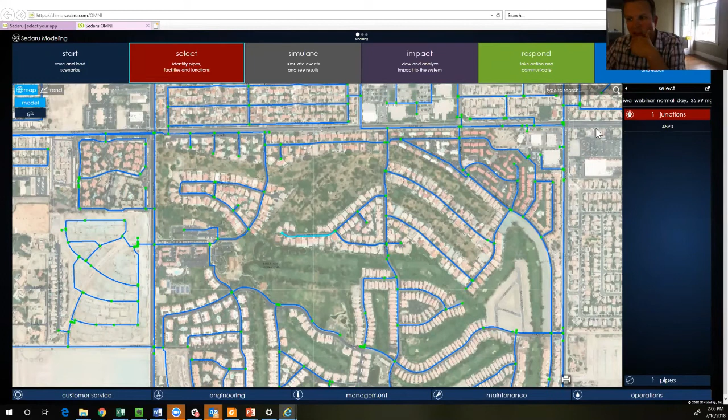So what's really neat here, I can use the map and zoom into whatever area that I want, and I can just pick a spot on the map. I'm going to pick this dead end here. And let's say I have a request that I want to see what I can do for fire flow here. So I click on that, and you see I have this junction selected. And if I go to the next button here that says simulate, it gives me a bunch of options for what I want to do, and I can choose one of those options.

So from here, I want to just be able to meet fire flow. So I'll click on that. And then it has this handy flow chart that really walks me through the process. So right now we're looking at a little over 6 GPM as the normal demand that's there. But I want to see what happens if I want to get 1,000 GPM out of this location. So I'll just put 1,000 in there. I'll click done, and it tells me what I'm doing up here. And then I just click run simulation.

What's cool about this is it's using the EPANet engine to run that simulation, and it's giving me back the hydraulics essentially right away. So it's going to spit out for me this hydrant curve. And you see along here, it's telling me exactly what I'm able to get. Right here at 20 PSI, I can get over 1,000 GPM. So it's laying out exactly what it should look like, giving me that full hydrant curve within a couple seconds of running the model. I can come back in here, and now I can view the map as well.

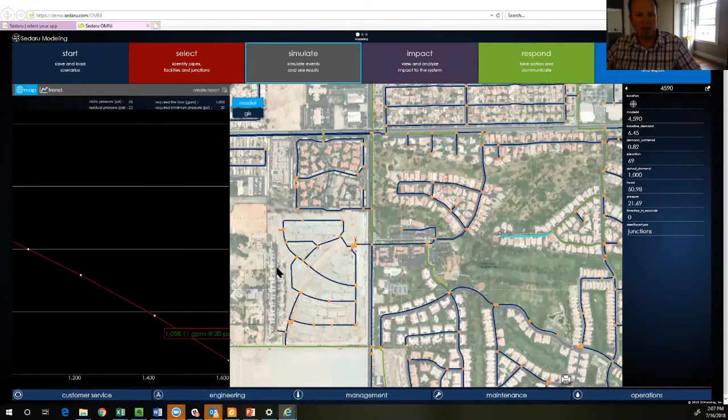And so the map has now color-coded everything for me. So if you look here, everything that's in orange is in the 25 to 50 PSI range with that demand that's on there. And I can see the results pretty easily. My velocities are color-coded. You notice the green pipes over here are ones that have a little bit higher velocities. The blue pipes are all pipe with less than a foot velocity in there.

So I very quickly can kind of see the results and say, okay, hey, if I needed to get 1,000 GPM out of this location, that's pretty doable. Well, let me ask you this. So that seems pretty cool, but what happens if we lose supply to one of those feeders going into that neighborhood? Yeah, I mean, common too, right? Like if I'm evaluating scenarios sometimes, or if I'm evaluating shutdowns, I might want to say, hey, I need to take an area out of service, but I still need to check fire flows. I still need to maintain sufficient fire flow protection.

So let's say maybe this north end of this development here, I'm going to lose service in one of those pipes that's in here. So I'll come in, I can just click on that pipe, right? I can see the details of it if I want. So I can come in there, I can see what we're looking at. It's an 8-inch pipe. Basically all the data from my model is going to show up in there if I wanted to look at that.

But then once I come over here and hit simulate, you notice up here it has a little thing where it says more changes. So now it's going to let me make more changes to this scenario that I'm working on. So since I have a pipe selected, here's my options that are in front of me. And we're just going to go ahead and close this pipe, bring it right out of service. So I'll go here and I'll click close. And then I'll click done. And now what we're going to do is rerun the simulation. And so it's going to update my fire flow for me.

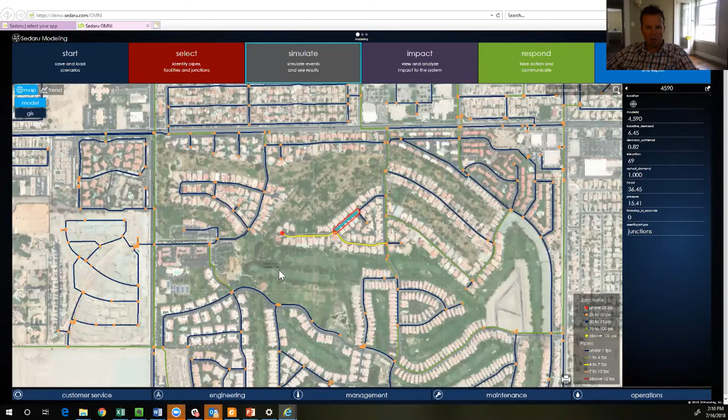Yeah. And then if I go back to my map, I'm going to be able to look at the color coding there as well. And I'll zoom out a little bit. We'll see what the rest of the system looks like here. And so now you look, as I get even farther away, over to this part of the system, which is farther away from the sources here, you see lots and lots of problems showing up in here as well. So clearly having that kind of fire flow coming in here causes all kinds of problems. And then within that area there as well.

Yeah. Is there other impact to that then that we could see? Yeah. So when I come up with the impact tile, I really like. So one of the things that happens when you're running a lot of the traditional hydraulic modeling softwares, I have to spend a bunch of time figuring out how to interpret my results. And what we've tried to do here is to make it really straightforward for you to see what is the biggest impact. So just really putting it out in front of you and showing you, okay, here's really the key problem, the key issue here.

And so what you see here, you see these red dots kind of flashing. That's showing me what are the top 10 nodes or junctions within this model that are going to be affected by this particular item here. And as I move my mouse over here, you'll see the red dot move and change. Yeah, it's kind of pulsing there. Yep. And that lets you focus in right on that and see exactly what the issue is, see exactly where the problem is.

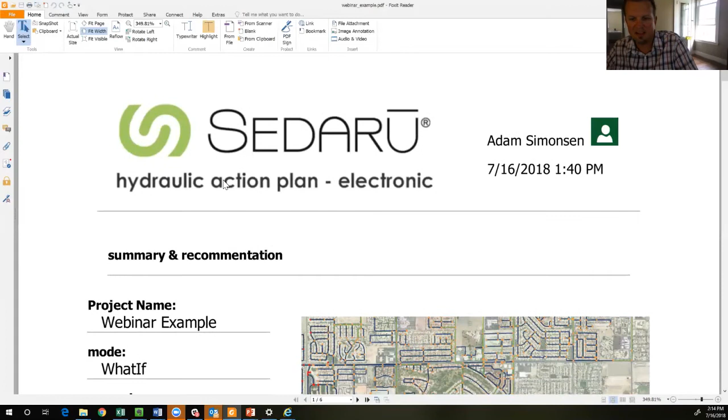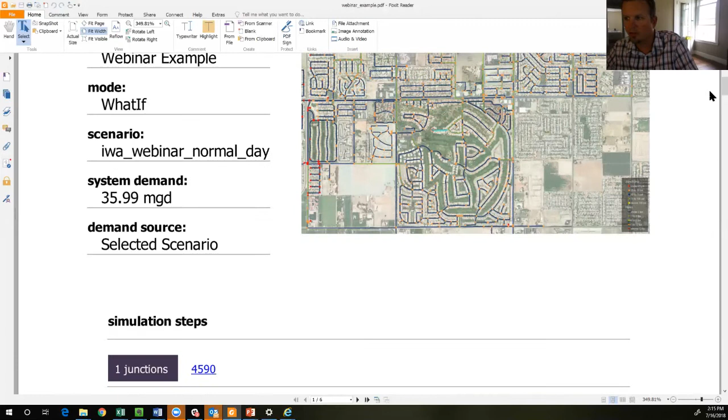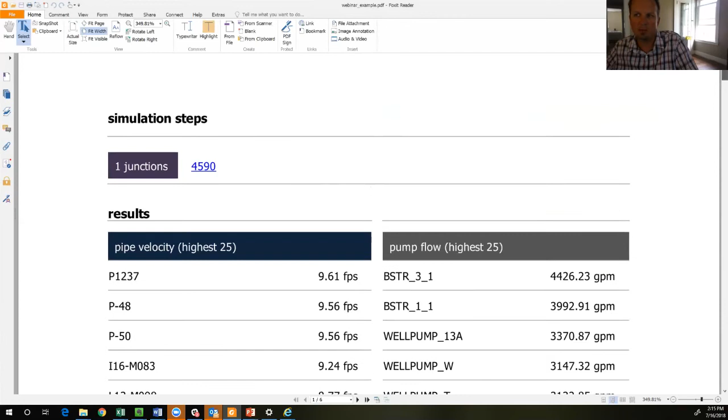So we'll let this generate and take a quick look at it. All right, cool, I think that report's done. I'll pop it up here real quick. Now I get to see the same thing: where were we looking at? What was the area? What was the system demand? What steps did I change in here? What kind of results did I see? I can scroll through all those, and you've got all of that tidied up in the report. So that PDF becomes really easy to pass on to anybody you want, developers or just internally as well.

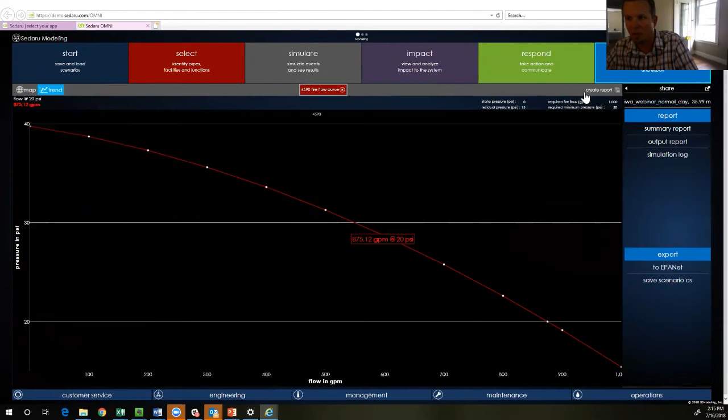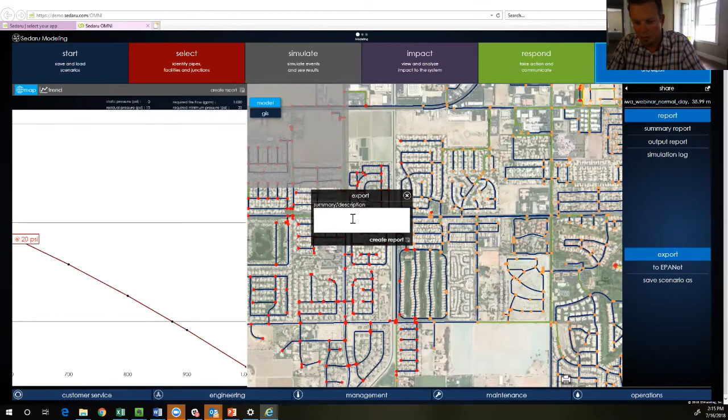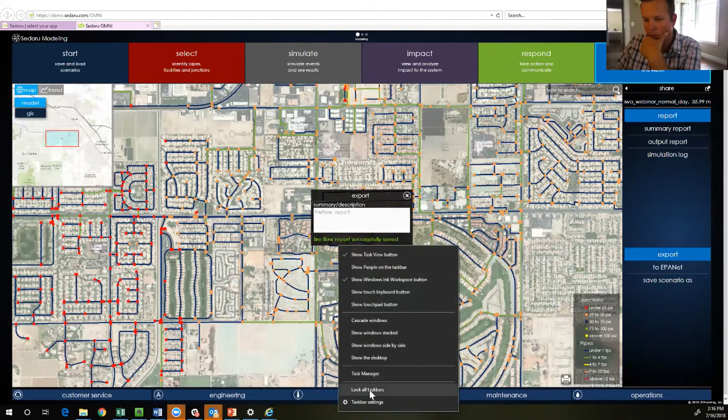And then I think you were also referencing, Kevin, maybe just a fire flow report if I don't need all that other stuff. So if I just want the fire flow report example, I'll come here and create the report. Oops. We'll save that one out as well. So you've got a couple different options to dig through the data and to quickly see the results. Let me pull that up real quick so people can see it. Give me one second.

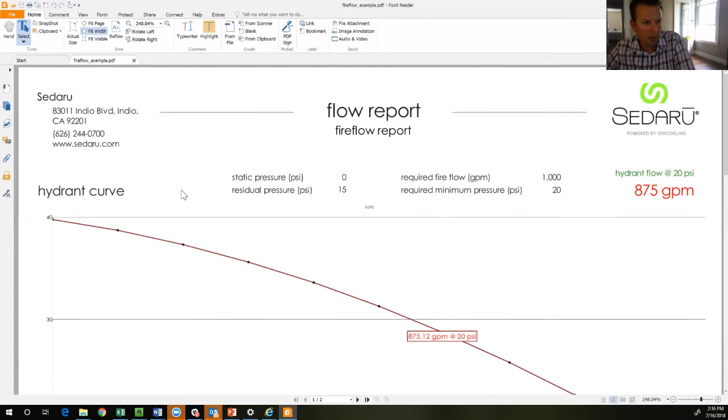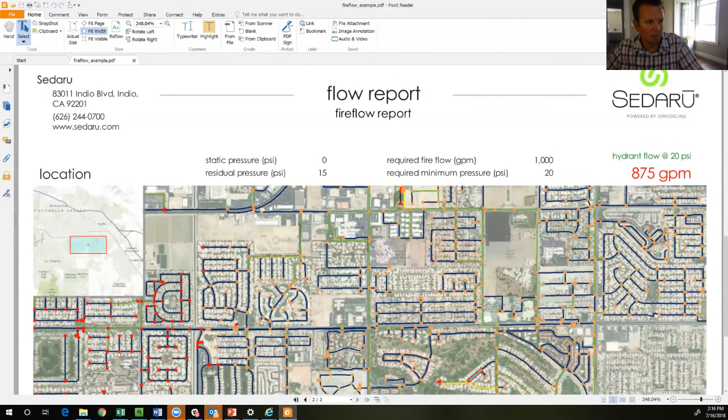So here we get to see that same thing, but now with the hydrant curve being the star of it. So I can see exactly what some of that would look like, and have all that detail right there for you. So really trying to simplify some of that stuff.

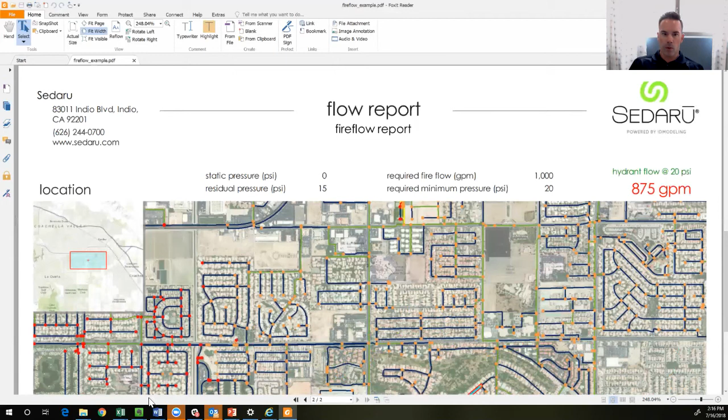Yeah, I think we have some utilities that use this for contractors. When a contractor wants to build, they'll go in and create this fire flow report based on the address, and then they basically staple that to a letterhead, and that's the final report. So that's cool. Right.

There was one of the questions that just came in, which is a good question in here too: can I show my actual hydrant layer here from the GIS? Which I can. So you notice up here in the upper left, I've got this ability where it says model and GIS. I can actually come in here and turn on my GIS within here. And let me zoom in here a little bit.

And so now what you'll see is actual locations of where I have hydrants in the system overlaid on the model itself. Nice. Along with all the granularity of my GIS data in here. So I can see all of that information directly within here.

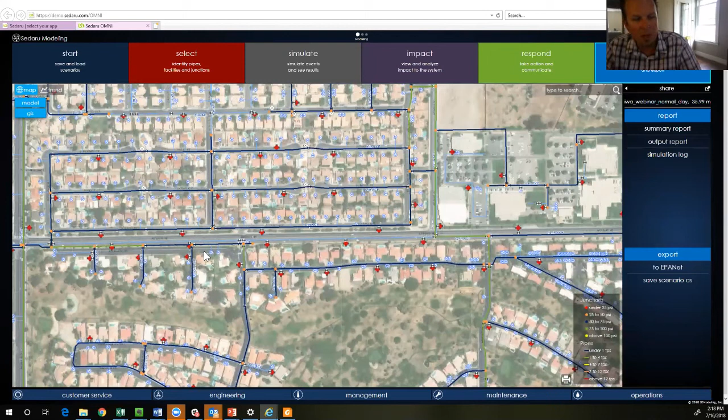So one of the classic problems that you have when running hydraulic models is, how do I keep my model integrated with the GIS, right? And there's a lot of workflows to do that. A lot of it is built off of how you handle your GIS maintenance and how often you want to update your hydraulic model. One of the things we do to help support that, though, is to just make it really easy to look at your model in conjunction with your GIS, and to be able to overlay the two really easily, look at it when you want to, and then when you don't want to, you can turn it off pretty easily.

Does it also have to be one-to-one with your model? With GIS? No, it doesn't. It's just spatially looking at it in the same way. There's a whole side of things that we could get into, the benefits or the downsides of trying to maintain one-to-one relationships between your model and GIS. And generally it's beneficial, but like I said, it takes work. So what you hate to see is somebody saying, well, I can't use my model because it's not perfectly matched up with my GIS, and I need to know this. So this gives me the best of both worlds right within here.

If I then toggle over here, I'm gonna go to our Omni interface, which some of you might be familiar with, right? And so this is really the main area within Sedaru where I see data from all these systems across everywhere. So what's cool about this is I can be running my modeling piece, looking at something, seeing what's happening there, and then I can toggle over to this view here as well, where I can come in and be like, what's this? We've got valve exercises that are scheduled out here, or let me see what is actually going on here with this particular customer, this particular meter.

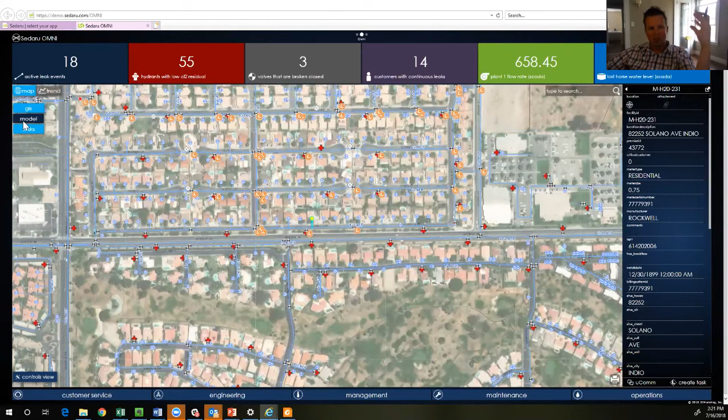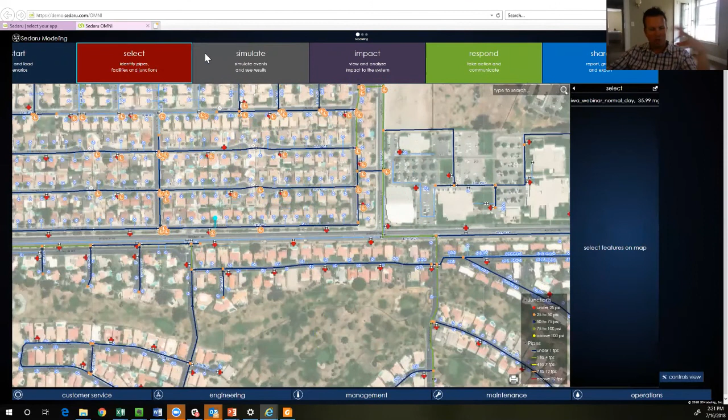I can see all that, and then if I want more detail about it, I just come back into my Omni interface, and then I can navigate everywhere around there. So it's really trying to do a good job at merging a lot of those pieces together, and to really try and help you, even if you don't have that perfect one-to-one relationship between the model and the GIS, to give you a platform where you can interact with all of those things pretty cleanly.

Let me walk through a couple other examples here for folks so you can kind of get a feel. I think most people who have dealt with models have this understanding of scenarios. Essentially what you're able to do is bring in a scenario from just about any other modeling package and bring that directly into Sedaru.

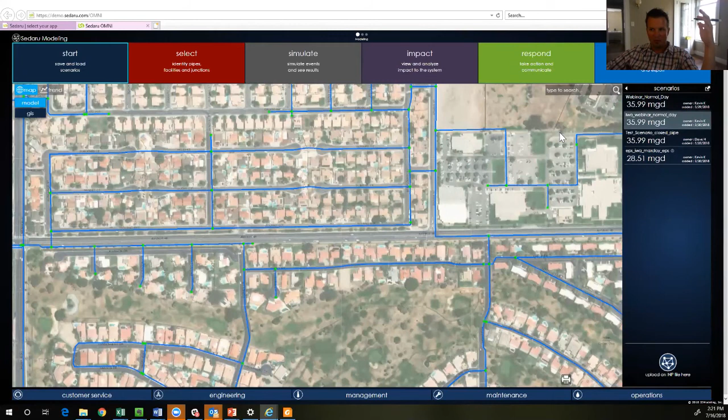So I'm actually going to bring in what we call an extended period simulation, or an EPS simulation, into here. You notice there's a few different ones listed in here, right? So you can have the ones you want available to you. And I can do similar sort of things in here. I'm not going to run Fireflow off EPS, but I can run any similar setup that I want. So maybe here I'm going to just select one of these nodes.

Real quick question, Adam. What is EPS? EPS is extended period simulation. So instead of just looking at a snapshot of what's going on, it's saying I want to look and see how the system behaves over time.

And so that means when I look at the results, here I'm going to change this demand from 5 or so GPM to 50 GPM, and I'm going to run the simulation. I believe this is a 24-hour simulation. And so now it's going to show me how the whole system behaves over 24 hours. I get a little message down here that the simulation ran successfully.

And then if we want to drill into the results, on the impact it shows me kind of minor changes to things, nothing overly dramatic. But I could go to one of these junctions and look at how the pressure behaves in that particular junction. I'm just going to take this Fireflow curve out of here so this is a little bit bigger.

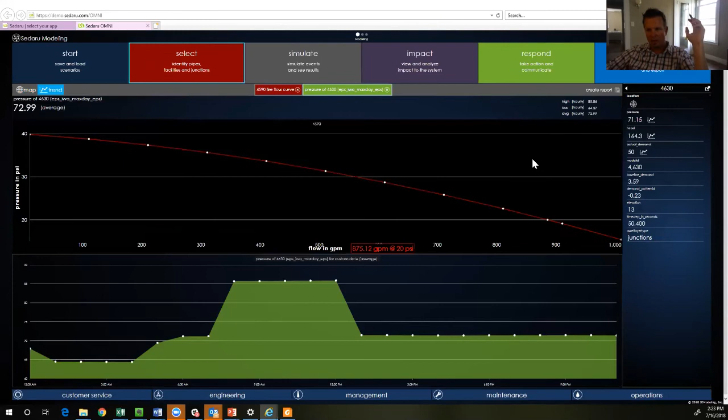So I can see now that with that particular demand condition, the pressure is going to be down here around 65 psi, and then as we get to the middle of the day, it's going to go up higher, and then go down. It keeps the same demand pattern. So what happens, Kevin, is that in an extended period simulation, there's usually a defined pattern for how the water gets used. It usually peaks in the morning and peaks in the afternoon, and so it follows that.

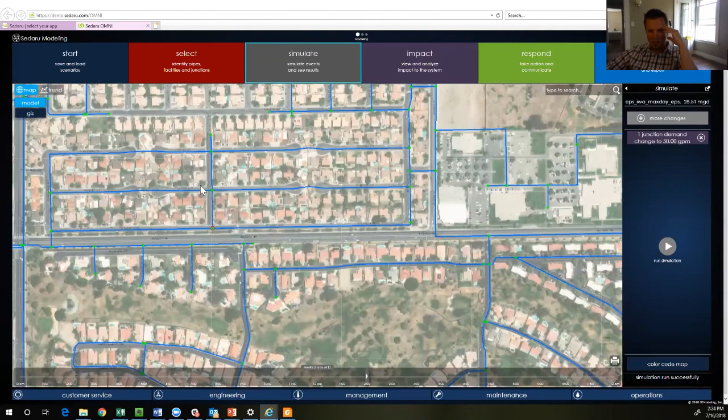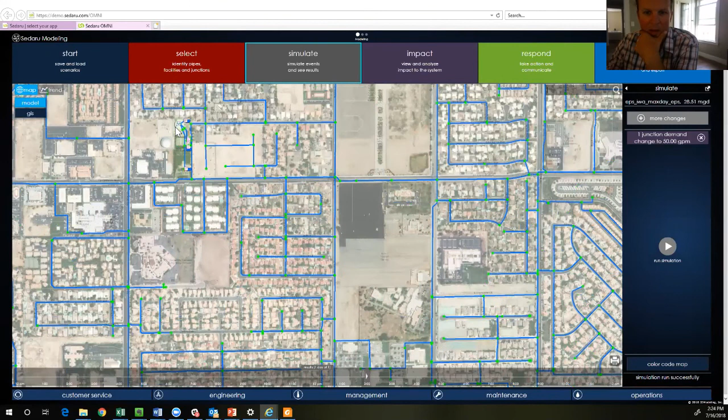And so you can evaluate the results throughout the system and see how these various pieces behave, and navigate the results and move around the system. I think I've got some tanks and pumps in here somewhere. And I can search for things too. If you can't remember, you can use the search bar and type in things. But I want to look at this particular tank.

So we'll look at this tank, same idea. Let me get rid of this graph. And now we can see how that tank behaves throughout the course of the day. So I can look at these things and see when it should be draining or filling, what the average looks like, all those pieces. Similar idea when I get into the pumps; I can look at that information.

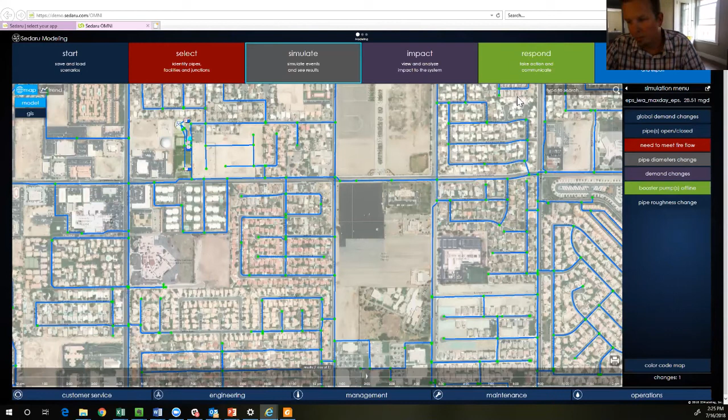You'll also notice here, if I come over to simulate, I can do stuff with these pumps as well. So I can take various pumps that I have in the system and turn them offline and evaluate scenarios from that perspective as well. So a lot of flexibility to run some of those different changes.

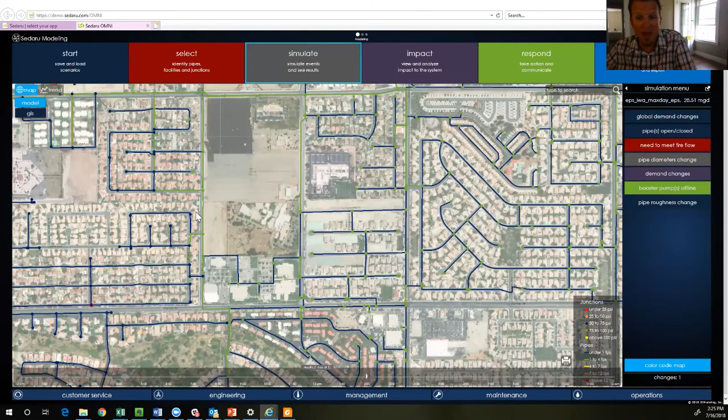What's that slider on the bottom? Good question, I forgot about the slider. So the slider, from a map view, is going to let me look at the results of my simulation with that color coding, but review it over time. So I can pick a time, say 2 in the morning, what is it going to look like? And if I play it, it will slide along, and at each time step it's going to update and show me what's happening at that particular time step.

And let me get an overview of the system and kind of see exactly what's going on. And if it moves a little slowly for me, it's like, okay, that's what it looked like now. Let's see, what does it look like at 10 o'clock? And then what's it look like at 6 o'clock? And be able to kind of navigate the results that way too.

So a lot of what you're trying to do with some of these things is to quickly wrap your head around what's happening and what's going on in the system, and to make some quick assessments on things. Does that kind of make sense, Kevin? Yeah, it does. That's really cool.

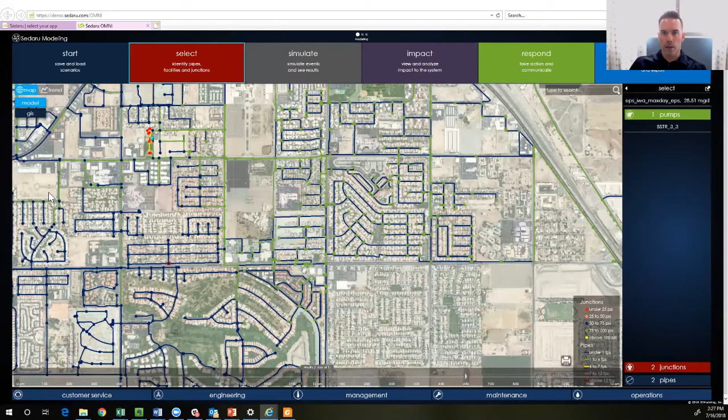Cool. So a couple questions we'll try to field on some of this stuff, and as you guys have other questions, just certainly let us know. There was a question about units in the reports. The units are kind of built into the reports at the moment, whether you go from GPM to FPS, feet per second.

You'll notice the color coding right here. When we're talking about feet per second, which is a velocity, when we're looking at velocity in a pipe, it's pretty standard definition. GPM is when we're looking at things at a more macro level. So we've tried to stay with a lot of industry standard stuff to keep it as straightforward as we can.

Reports in Excel. Right now, these other reports are basically set up as PDFs. When I'm looking at other reports, Kevin, can I get them out in Excel? I can't remember. I can. Yeah. So when you want to drill into individual nodes or junctions, like if I wanted to get the breakdown of these tank levels for each time step in Excel, I can get that data out that way as well.

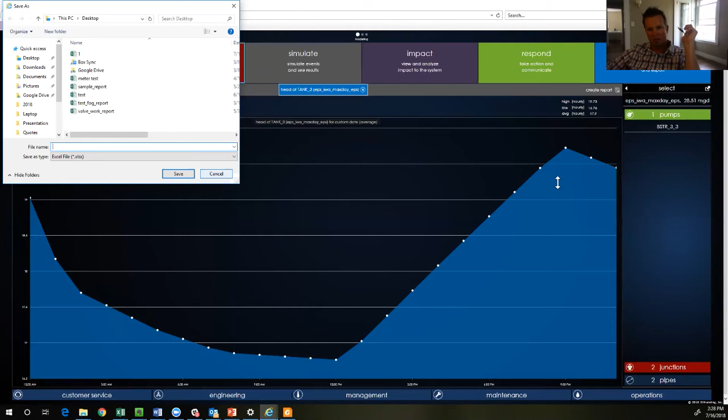And there was a question about the FireFlow report. Is it sufficient quality for a PE to stamp? Which is a really good question. I'll tell you this: the FireFlow report was built for utilities so that they can run their assessment, run their analysis. It's using the EPANET hydraulic engine. It has all of the standard pieces that go into it.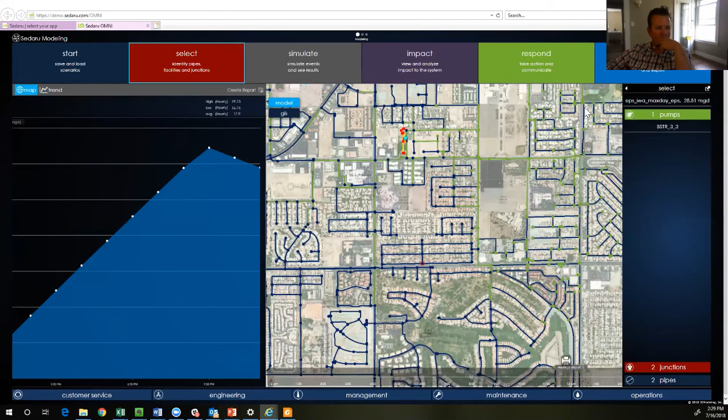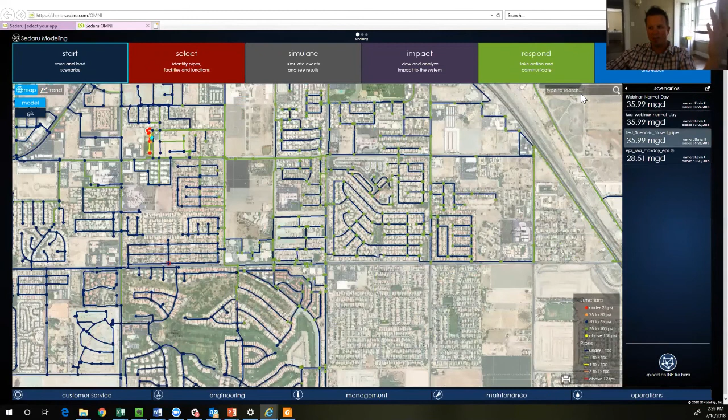The trick in understanding what to do with some of those things, obviously, is where did my model come from? Understanding the scenario that I'm playing in here, is that the right scenario? Should I be running my fire flow analysis on an average day, on a max hour scenario? These are the sort of things we talk about from a PE engineering perspective that you certainly want somebody with the right qualifications thinking about.

One of the things that I like about what we're doing with modeling and how I have seen it used by utilities is you might have your workflows for how you define your approved hydraulic modeling scenarios. Those scenarios themselves show up in here. You're publishing them into here. So you have control over what scenarios would actually be available for folks to use.

And so every time you're setting this up within your organization, like any piece of software, you're defining what are the workflows, what are the ways that we're going to use it, and how we're going to have things happening in there.

There was a question too about, can we add pipes in here? At the moment, no, you can't add pipes in here. There's a fairly healthy list of new features and developments that you're going to see us rolling out with Sedaru Modeling over the next 12 months. That's one of the things in there.

We just recently updated all the back-end infrastructure on this, which was really pretty cool. We made a whole bunch of performance improvements, and it's been really exciting to see some of our largest customers running modeling, some of the really big utilities around the country. They can now run this model pretty much as fast as the EPANET engine runs, so you're talking about running 20,000 pipe models in 30 seconds.

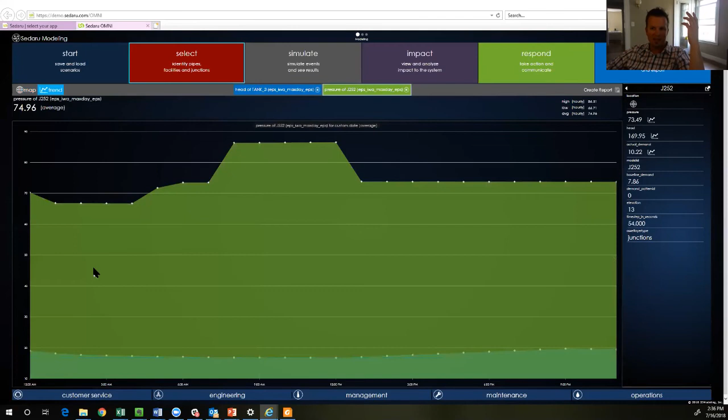And certainly we get into some water quality stuff. You see here, we're back to looking at pressures in here, right? Well, this tank level is a good example. What my tanks are doing often drives a lot of water quality issues, in terms of water age and some of that stuff. So a lot of the pieces are there for us to be able to jump on it and to look at water quality results and analyze that.

As you get into water quality modeling, most folks don't have a terribly well calibrated water quality model. That's another animal in and of itself. But certainly I can see the water age piece of it really becoming valuable there. And really, much of what we do from a Sedaru side is very driven by the priorities of our clients.

And so, the more folks that come out and tell us, hey, I want to see water age modeling in here tomorrow, because it's going to help change the way we do something, that's going to make it easier for us to prioritize that functionality and get those pieces added in there.

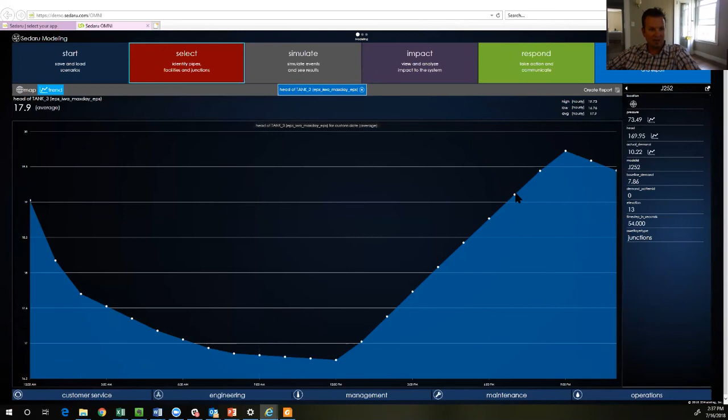Let's see. How many scenarios can you upload? There's not a physical limit on the number of scenarios that you can upload. We do like to encourage folks to keep it organized, because that makes your life a lot easier, rather than just willy-nilly putting things in there.

The Sedaru modeling tool is not meant to be the be-all, end-all modeling tool for most organizations. You're still going to have a tool that you use for calibration of models. Consultants are certainly going to be using those things. It's meant to be the tool to consume these completed hydraulic models, work with them, and run those analyses internally, and not necessarily be reliant on a single hydraulic modeler to do all of your pieces.

And there was a question up there around that too, like what's the interface for calibrating the model. Again, this isn't designed to be the model calibration tool per se. And I think that's some of your reference, Kevin, to the cockpit, right? The world of calibrating hydraulic models is its own world, and there are some very specific things that you need to do and look at. This isn't designed to do that.

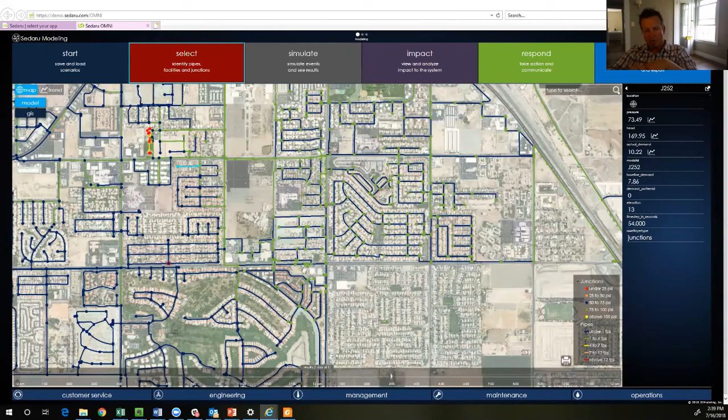Certainly one of the things that we're doing, and I think we'll do another Sedaru Live about this, is we do have an interface that's designed all around real-time hydraulic models. That's really one of the next phases of this: looking at, okay, what is my tank level at when I'm running the simulation? What are my pumps doing? And we've got some of these real-time hydraulic models.

You hear us reference Sedaru Ops. Sedaru Ops is our real-time hydraulic modeling interface. And it's really designed, again, with the same idea of non-hydraulic modelers being able to synthesize SCADA with this hydraulic model, look at a forecast, and see the things that are happening in the future.

Yeah, and that's cool to see, especially with operators. These are guys that are not hydraulic model experts at all. They're in charge of making sure that water's production and everything's working as it's supposed to. But they're able to do very advanced real-time hydraulic modeling with a very simple interface that they don't have to be experts in. Right.

And I think that's a big point of what we're showing today: this is a tool for all the people that don't get to use the results from the model on a day-to-day basis, but would really benefit from it. So instead of the one engineer in the back of the room that's able to run the model, now we're able to take all of the work that's been done to create, to calibrate, to validate the model, and share that. Hence the modeling for the masses. The point of this is to put it in the hands of more people to really benefit from all that work that's put into it. Right. Absolutely.